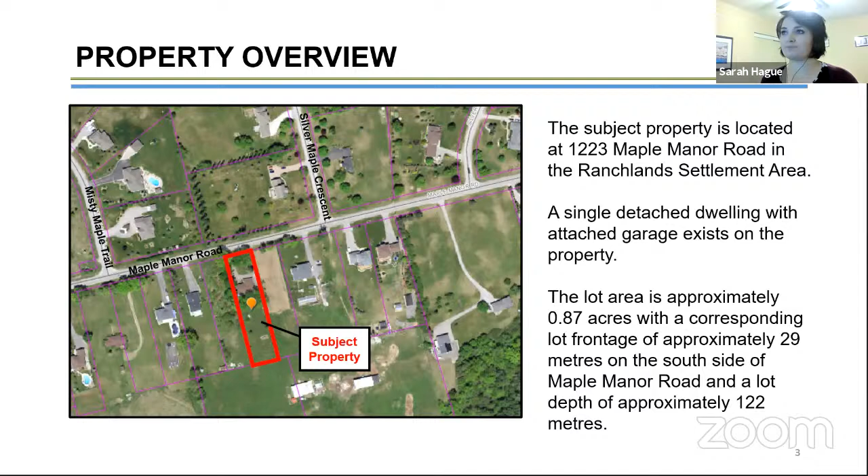The applicant is seeking relief from the provisions of the general zoning bylaw to construct two accessory structures, a detached garage and a shed, which exceed the maximum permitted lot coverage for accessory structures, and to allow the garage to be built 6 inches taller than the bylaw permits.

The subject property is zoned as Z2A, which is rural residential, in the general zoning bylaw 689-83. A dwelling unit and accessory uses are permitted land use activities within this zone.

The proposed shed is 12 feet by 12 feet, or 3.66 meters by 3.66 meters, for an overall size of 13.4 square meters, or 144 square feet. It is proposed to be 4.2 meters in height.

The proposed garage, which the elevations can be seen here, is 9.14 meters by 15.24 meters, or 30 feet by 50 feet, for an overall size of 139.4 square meters, or 1,500 square feet. The height is proposed to be 5.36 meters, which is 17 feet 6 inches. The eastern portion of the existing driveway is proposed to be extended to access this detached garage.

The variances being requested are to increase the lot coverage for accessory structures from the existing provision of 3% up to 4.4% to allow both the shed and the detached garage, and to increase the maximum height of the detached garage only from 5.2 meters to 5.4 meters.

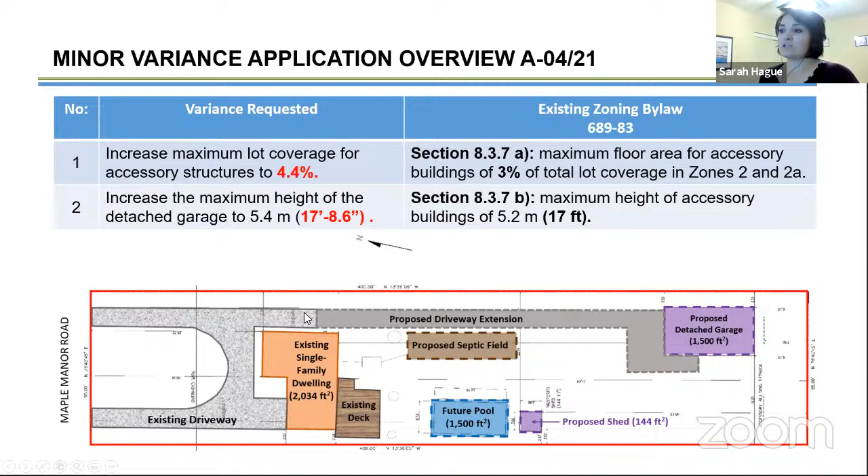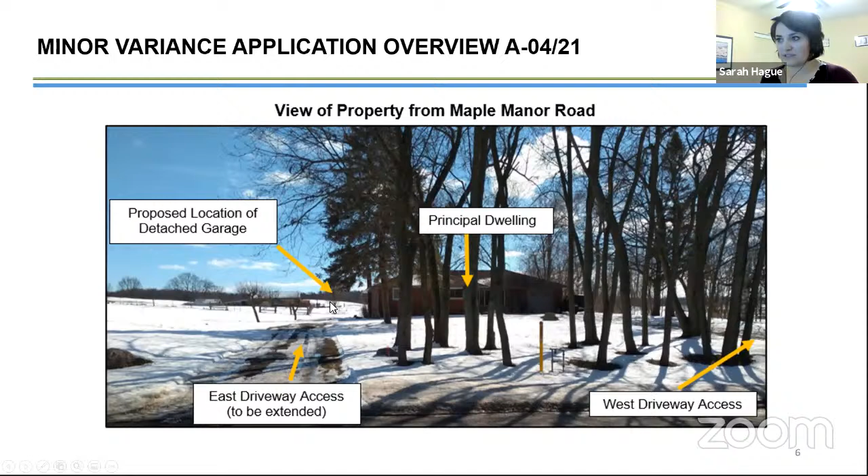This is the view of the property from Maple Manor Road. As you can see, this is the existing dwelling here. The western driveway access is about here. This is the eastern access, and the proposed detached garage is about here.

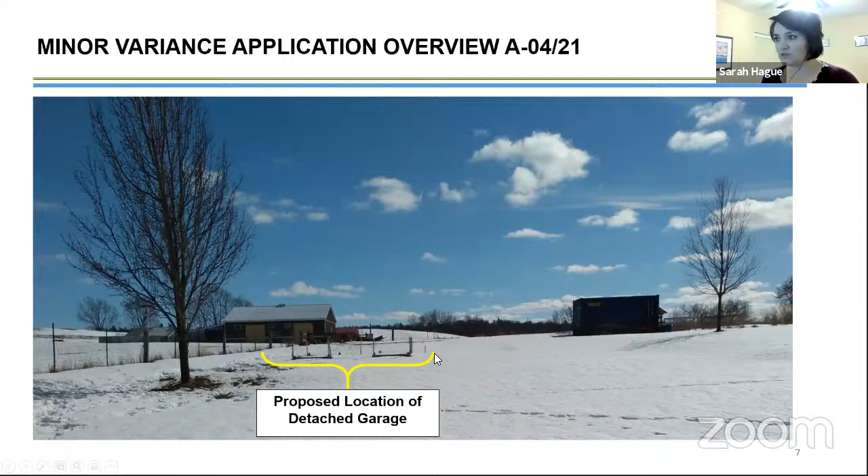This is a view from the rear yard of the property towards the south, looking approximately where the location is proposed, which is in this area. I superimposed the elevation of the front, and this is approximately what it would look like. It's not 100% accurate to scale, but this is the best I can do. So this is an idea of what it would look like once developed.

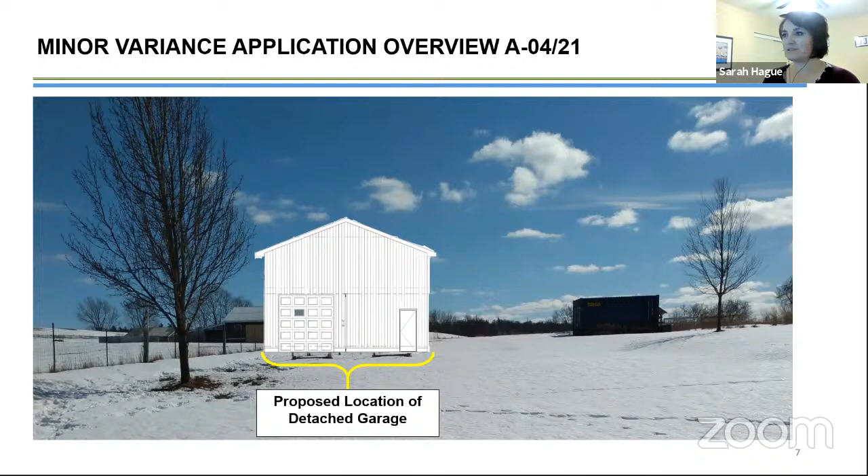In terms of the planning analysis, the application needs to meet the 4 tests of a minor variance. The first is whether the proposed variance conforms with the general intent of the zoning bylaw. The intent of the zoning bylaw is to regulate land uses and controls with respect to the placement of buildings on land. The subject lands are zoned Z2A, rural residential, and a dwelling unit and accessory uses, including a shed and detached garage, are permitted land uses within this zone.

Number 2, does the proposed variance conform with the general intent of the official plan? The subject lands are located within the Ranchlands settlement area, as illustrated on map 2.19, and rural area and protected countryside, as illustrated on map 7 of the official plan, and residential uses are permitted activities within all of these designations.

Number 3, are the variances minor in nature? The maximum lot coverage provision is intended to restrict the size of accessory structures to ensure an appropriate balance between built form and open space, recognizing the remaining open space at the rear of the property, plus the existing deck and proposed future pool. Staff are of the opinion that the proposed increase in lot coverage will not negatively impact the amenity space of the property, and that the variance is minor in nature.

The maximum height provision for accessory structures, specifically the detached garage, is to ensure these structures are not more prominent than the principal dwelling. The proposed increase of 0.2 meters is extremely minor and will not be discernible from its location, approximately 97.5 meters from the street line. Additionally, with its proposed location in the southeast corner, it will not interfere with or impact the amenity space of adjacent properties.

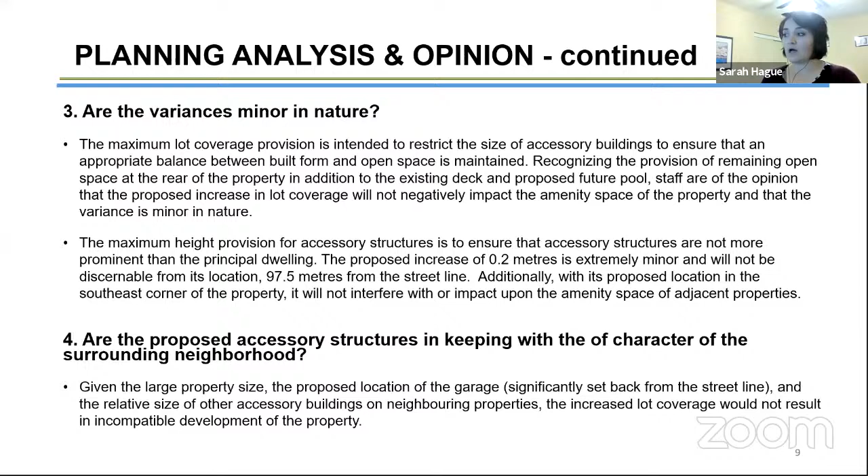Number 4, are the proposed accessory structures in keeping with the character of the surrounding neighborhood? Given the large property size, the proposed location of the garage set back significantly from the street line, and the relative size of other accessory structures on neighboring properties, the increased lot coverage would not result in incompatible development of the property.

In terms of consultation, we circulated the notice as per the Planning Act, and no correspondence was received from members of the public. From agencies, we received no objections from the GRCA, Energy Plus, or the Region of Waterloo.

The Public Works Department commented that if modifications to the existing entrances are required or requested, a permit must be obtained from the township, and a lot grading plan will be required at the time of a building permit. The building department also commented that the accessory structure cannot be utilized to run a business out of or

as a secondary dwelling. Permits will be required for the accessory structures, pool, and new septic system. Compliance with the Ontario Building Code and all municipal bylaws will be required at the time of permitting, and a grading plan and survey may be required at the time of permits.

K-Smart Engineering commented that construction of the garage will reduce grass area and increase rainfall runoff from the roof, and suggested that the owner provide additional information regarding grading and runoff direction.

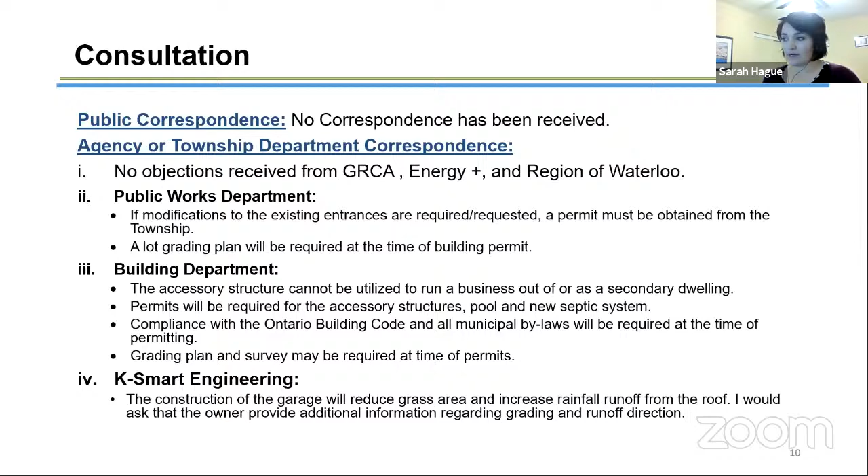In terms of a staff recommendation, based on the planning analysis, staff recommend that minor variance A-04/21 for 1223 Maple Manor Road be approved as follows: relief from section 8.3.7A of General Zoning Bylaw 689-83 to permit the maximum floor area of all accessory buildings to exceed 3% of total lot coverage, to a maximum of 4.4% total lot coverage, and relief from section 8.3.7B of General Zoning Bylaw 689-83 to permit the maximum height of the proposed detached garage to exceed 5.2 meters or 17.06 feet, to a maximum height of 5.4 meters or 17.72 feet, subject to the following condition.

The proposed accessory buildings shall not exceed a gross floor area of 154 square meters or 1,657 square feet.

Back to you, Madam Mayor.

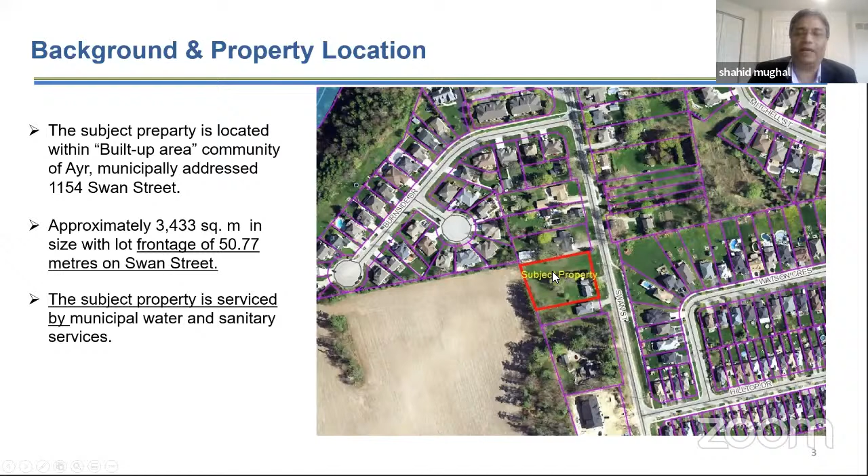The subject property is located within the built-up area community of Ayr, which is municipally addressed 1154 Swan Street. The property is approximately 3,433 square meters in size, with a lot frontage of 50.77 meters on Swan Street. The subject property is serviced by municipal water and sanitary services. As you can see on the picture, the subject property currently contains a single detached dwelling and a detached garage.

The northern portion of the property contains an easement in favor of Enbridge Gas for the purpose of a high pressure gas transmission pipeline. The balance of the property, as you can see, has landscaped grass and contains several mature trees.

Staff also reviewed provincial policy documents, regional statutory documents, and township statutory documents as well. The provincial policy statement encourages intensification and high density in the settlement area, and states that the settlement area shall be the focus of growth and development. The Growth Plan for the Greater Golden Horseshoe also directs growth to settlement areas and encourages development through intensification within built-up areas. The Growth Plan also encourages intensification generally in the settlement area, supports housing choices through the achievement of minimum intensification and density targets, and identifies a diverse range and mix of housing options and densities.

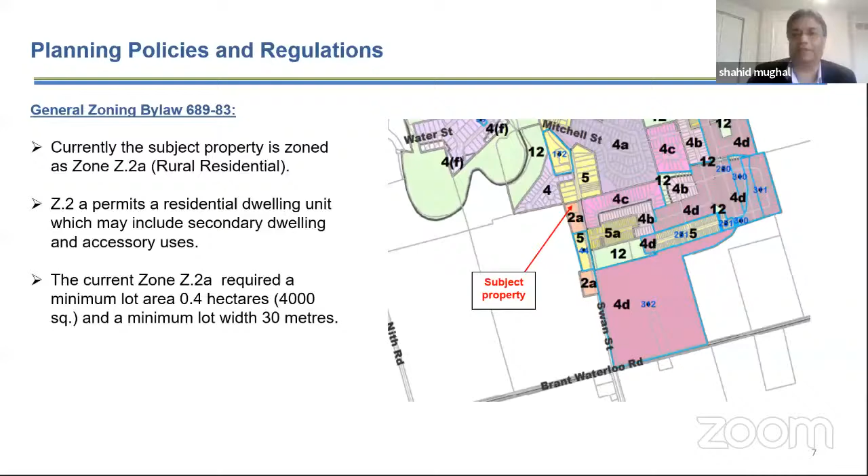Let me share the proposed plan. As you can see on the screen, the severance sketch. The applicant proposed 2 semi-detached in the form of 4 freehold residential units, lot 1A, 1B, 2A, and lot 2B. The proposed lot line dividing the semi-detached dwelling would be along the common wall.

The proposed lots would vary in size from approximately 556 square meters to 1,742 square meters, with corresponding lot frontage of 8.5 meters to 25.27 meters. As you can see, there are 3 lots with frontage of 8.5 meters. The 4th lot is 9.14 meters, but that also incorporates the easement block, so that would be approximately 25.27 meters in width.

An easement is also proposed on the northern portion of the property to recognize the existing Enbridge gas pipeline corridor within the reconfigured lot boundary. The existing residence, as I mentioned, there's also a single detached dwelling and accessory structure on the property, and that will be removed to accommodate the proposed development.

Each proposed dwelling unit is to have driveway access onto Swan Street, and each lot will be serviced by municipal water and sanitary sewer. The zoning bylaw amendment application is also proposed.

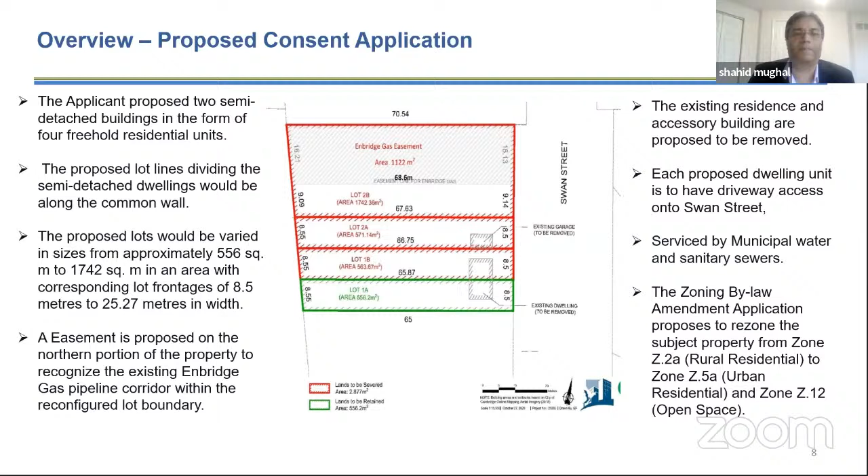Following the public consultation process, staff also notified the adjacent property owners. So far, we haven't received any public comments or concerns regarding this application.

Staff also circulated the sufficient package to agencies and departments. The regional staff have expressed no concern, and mentioned that prior to final approval, the applicant needs to complete the required access permit, complete a lot grading plan, and enter into a registered development agreement with the Region of Waterloo to include a noise warning clause in all agreements of offer of purchase and sale, lease and rental agreements for both the severed and retained lands.

Grand River Conservation Authority expressed no concern. Public Works Department expressed no concern.

The Township Consulting Engineer commented that at the time of building permit application, the proponent needs to provide a site grading plan and servicing plan prepared by an engineer. They also required a soil assessment to show suitability for infiltration. As no drainage onto adjacent land is allowed, swales are to be constructed along the property line to direct surface water towards Swan Street.

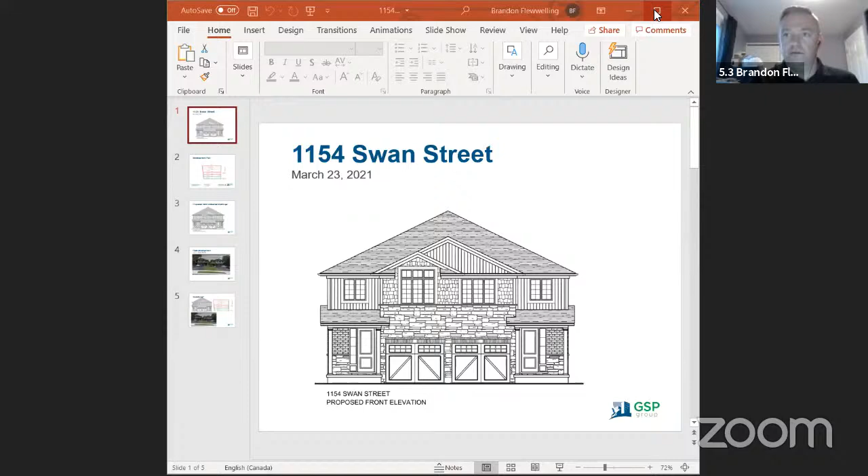Good evening, my name is Brandon Flewelling. I'm the planning consultant to the applicant, and I just wanted to provide a few comments to supplement what we've heard from the staff report already.

What is proposed are 2 semi-detached dwellings. Before you is a line elevation of what the proposed dwellings would look like when developed. They will be built and sold by Willow Homes, which has a history of development in the community and has built similar units just north of this property on the opposite side of Swan Street. I have representative photos of that, and they also developed a condominium along Butte Street in the township, so it's a well-known developer here.

So proposed is the elevation. They would be semi-detached units, 2 buildings looking generally like this. Each semi-detached unit would be approximately 2,400 square feet, quite large for a semi-detached unit. They would have a single car garage, and it's proposed they be set back into the site a little further to allow for a longer driveway to accommodate 2 vehicles in front of the home if possible.

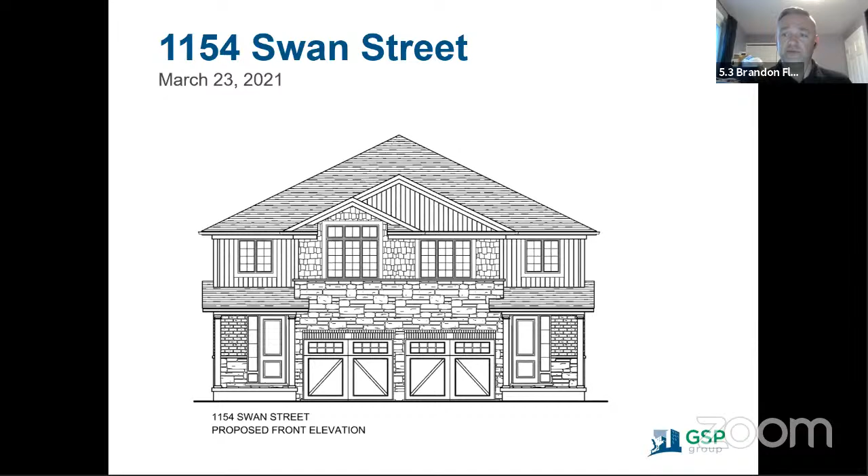Mr. Mughal did a good summary of the proposed consent application. As he noted, there is a zone change required along with this, and when committee closes and goes back into council later, you'll see this same application come back for the zone change portion. I'll be available for questions at that time, but I won't duplicate my presentation.

Before you now is the proposed severance application. The existing house and garage would be demolished, and 2 semi-detached dwellings built with the demising wall down the middle, aligned with the property line.

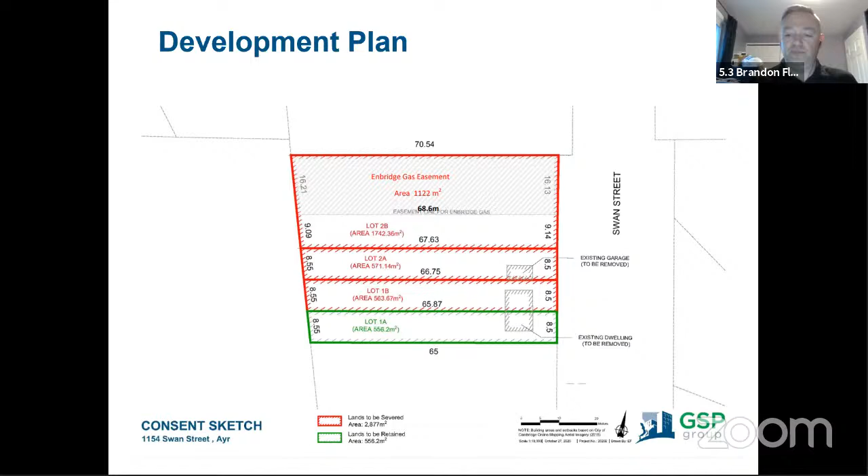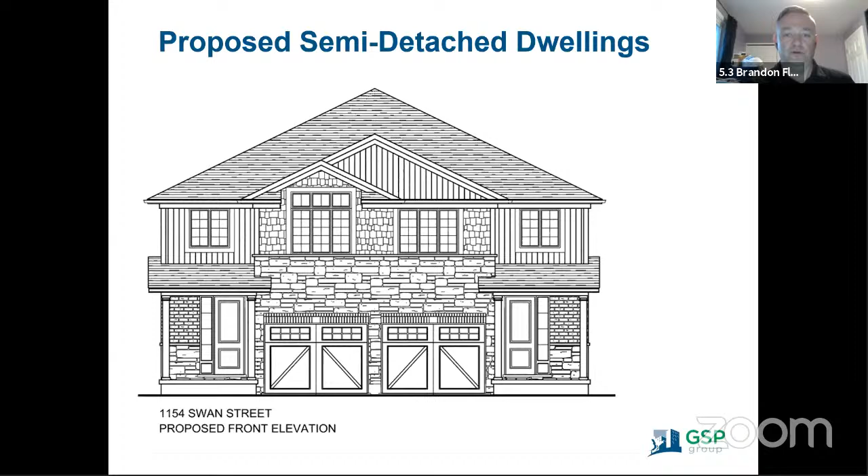And really, that concludes my presentation. I look forward to hearing any comments from members of the committee. As I said, I'll be available for the zone change portion of the meeting, but won't duplicate my presentation. If there are any questions for either, I'd be happy to answer them now.

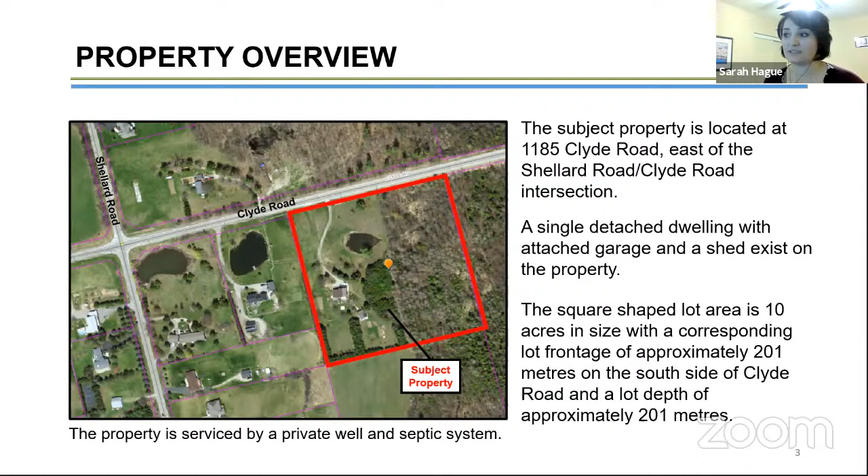The subject property is located at 1185 Clyde Road, east of Shellard Road and east of the Shellard Road Clyde Road intersection. A single detached dwelling and attached garage and shed exist on the property. The square-shaped lot is 10 acres in size, with a corresponding lot frontage and lot depth of 201 meters. The property is serviced by a private well and septic system and is outlined in red on the map.

The subject property is zoned Z1 Agriculture in General Zoning Bylaw 689-83. A dwelling unit, coach house, and accessory uses are permitted land uses and activities within the Zone 1 Z1 zone.

The applicant is seeking relief from the provisions of the General Zoning Bylaw to construct a coach house within the front yard of the property, which also exceeds the maximum size of a coach house. The proposed coach house is 7.32 meters by 11.89 meters, approximately 24 by 39 feet in size, and 4 meters in height, or 13.12 feet.

I've put a more detailed lot plan of the property here. It is a very large property, but as you can see, the eastern portion is covered by GRCA wetlands and needs to be avoided. There is a pond on the northern portion of the property. The existing house is here in the middle, with a shed in the rear yard, and the existing well here and existing septic bed here.

The proposed coach house is outlined here in yellow, with the proposed septic bed for the coach house here, and the proposed well is here.

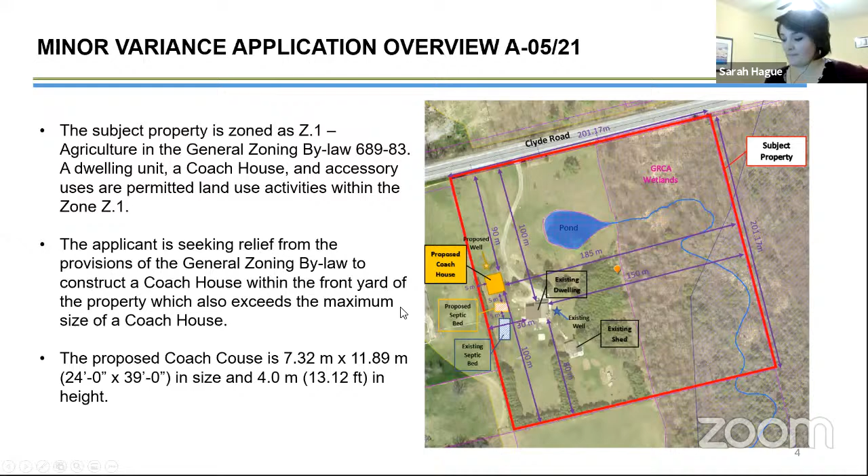To permit the minor variance application, the overview is the requested variance to permit a coach house with a maximum size of up to 87 square meters or 940 square feet, which is approximately 70% of the footprint of the existing principal dwelling unit. Whereas section 6.40.7(i) of the bylaw permits the size of a coach house to be not greater than 40% of the footprint of the dwelling unit or 110 square meters, whichever is lesser.

As you can see, the proposed size of the coach house is smaller than the maximum size of a coach house, but is exceeding the percentage of the dwelling unit, as it's only taking into consideration the main floor, the footprint. It doesn't consider the second story or the garage.

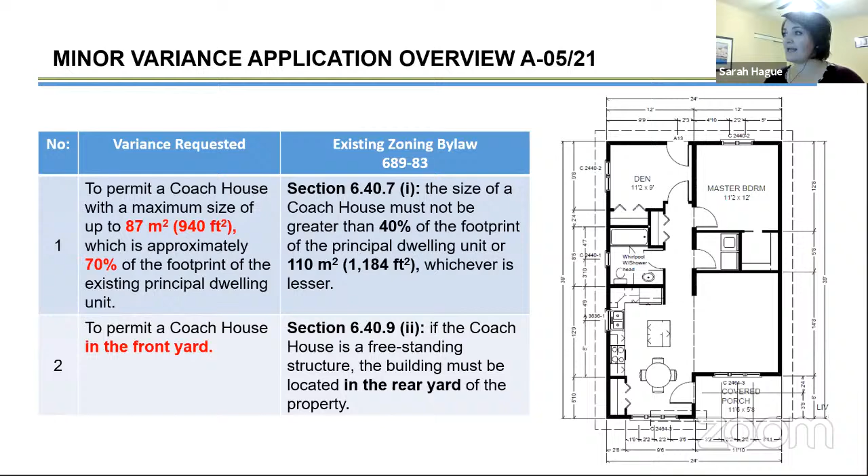The second variance is requested to allow the coach house in the front yard, where the provision permits it only to be in the rear yard of the property. This is a layout of the proposed coach house here.

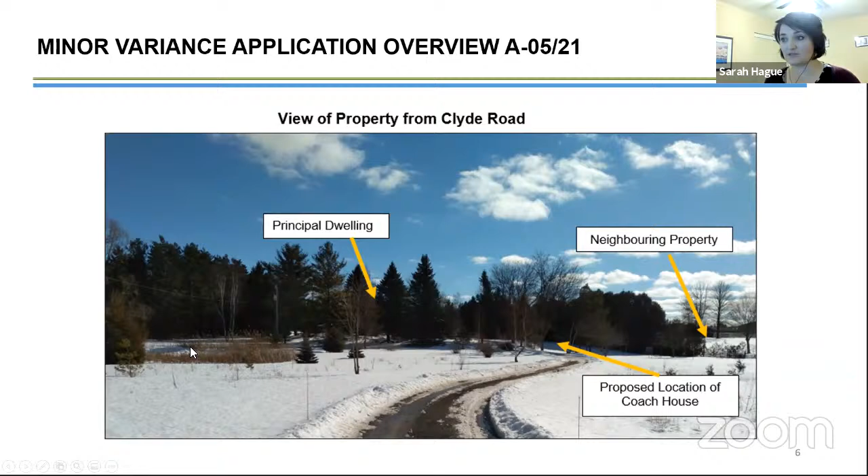This is a view of the property from Clyde Road. It is very private. There are several mature trees on the property, which shield both the principal house and will partially shield the location of the coach house from view of the street. This is the neighboring property here. The proposed location of the coach house is in this area, and the principal dwelling is located behind these trees. This is the pond referenced on the map.

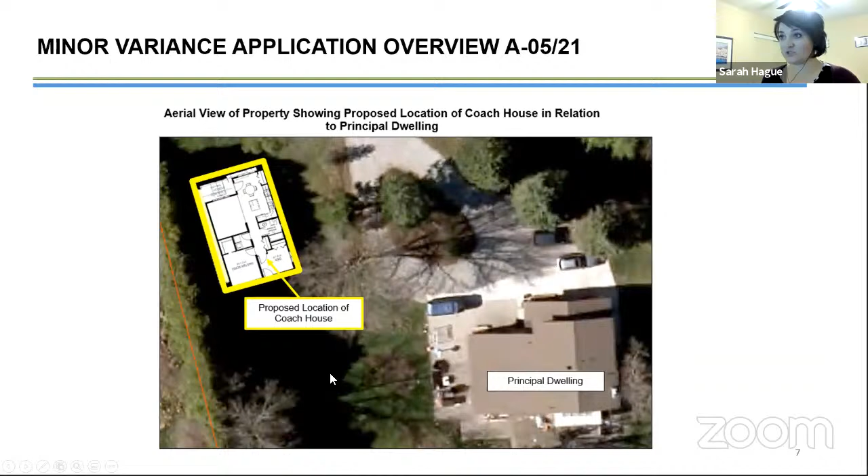This is an aerial shot of the property showing the location of the existing house and generally where the coach house will be with the layout here. This is also showing a relative size of the coach house.

In terms of the planning analysis, I wanted to look at if there were any other alternative locations. The provisions of the bylaw do permit a coach house to only be in the rear yard. While there is a very large rear yard on this property, anything behind the main dwelling, there are reasons why it cannot be located in any of them. I've chunked out the property here in 6 different sections.

Section A, none of this area can be used as it is a wetland. Section B is within 30 meters of the wetland, which also needs to be avoided and is also heavily forested. Technically he could have put it close to here, but it would have required the removal of several mature trees, which the applicant wanted to avoid.

Number C, this area here is not accessible because of the terrain. There's a low-lying area around here, which actually required the applicant to construct a footbridge to access even this shed. So it would not really have been accessible via a driveway to get back here, nor would you have been able to build a driveway due to the location of the shed and the mature trees. This section here labeled as D has the same terrain issues.

So there's a low-lying area here that would be very hard to get over. You'd need culverts and that sort of thing. You would need to extend the driveway significantly, and it would have to go over the septic bed, which you can't do. So location E can't be used as it is the existing location of the septic bed for the primary house.

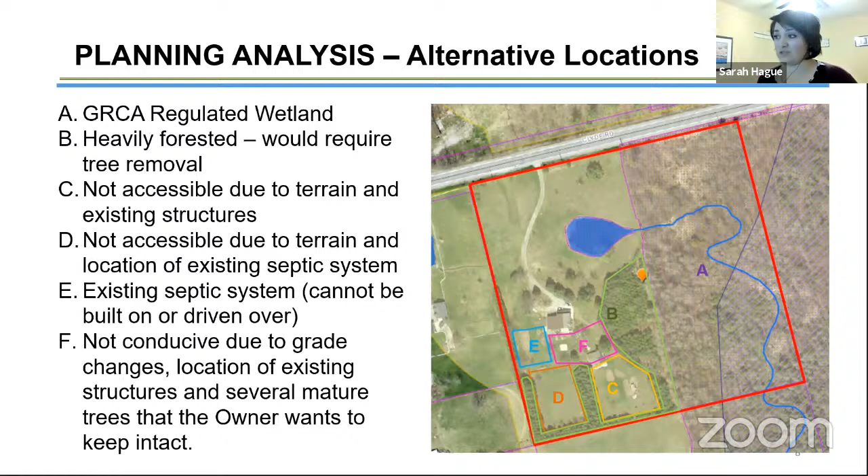So in terms of the planning analysis, we again need to evaluate it against the 4 tests of a minor variance. Number 1 is if the proposed variances conform to the general intent of the zoning bylaw. The intent of the zoning bylaw is to regulate land uses and controls with respect to the placement of buildings on land. Subject land is zoned Z1 agriculture in the zoning bylaw, which allows a dwelling unit, accessory uses, and a coach house.

Does the proposed variances conform to the general intent of the official plan? Residential uses are permitted activities within the agricultural, rural area, and protected countryside designations, which this subject property has.

Number 3, are the variances minor in nature? The intent of restricting the size of a coach house and only allowing it to be located in the rear yard of the property is so that it remains subordinate to the primary dwelling. The subject property is unique in terms of its terrain and the associated environmental features. So despite its large size, it's not possible to locate the coach house in the rear of the property.

The proposed coach house is 936 square feet, which is approximately 250 square feet less than the maximum size allowed in the bylaw. But the total size of the principal dwelling is over 2,700 square feet, 40% of which is 1,100 square feet, which is well above the proposed 936.

But as the provision states that the coach house must not be greater than 40% of the footprint of the dwelling unit, which does not include the attached garage or second story, the footprint of the dwelling unit is calculated as 1,348 square feet, 40% of which is only 539 square feet, which is really not sufficient enough to allow for a dwelling unit or a coach house.

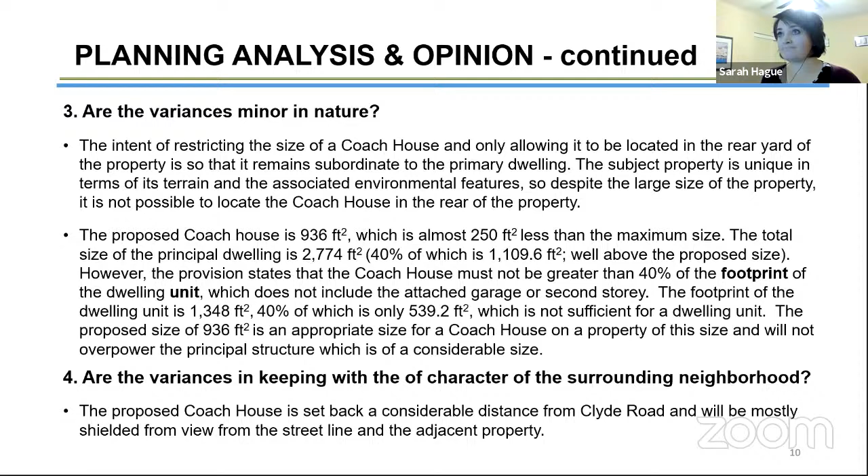As per the Planning Act, we did circulate the application as required. We received 1 letter of concern from a neighboring property. The concern regarded flooding in the area. There are several private ponds in this area, and he has noticed that they do flood from time to time, and just wanted to make sure that the proposed coach house would not be affected by the flooding, and was concerned about water control problems in the future, which we will handle through the building permit process.

In terms of agency consultation, no objections were received from K-Smart Engineering, Energy Plus, the Waterloo Catholic District School Board, or the Region of Waterloo. The Public Works Department commented that Clyde Road is under the jurisdiction of the Region of Waterloo.

The applicant is advised that a permit may be required from the Region of Waterloo for any modifications to the existing entrance, which I do not believe are proposed at this time. And the applicant is to be advised that a new entrance will require a permit from the Region of Waterloo. The building department has no concerns from a building code perspective, but noted that permits will be required for the septic system and the construction of the coach house.

The Grand River Conservation Authority has no objections. A permit for the construction of the coach house and installation of the septic system will require a permit from the GRCA under Ontario Regulation 150-06. The entire area is regulated by the GRCA due to the Moffat Creek Swamp provincially significant wetland, a tributary of Moffat Creek, and portions of its associated floodplain.

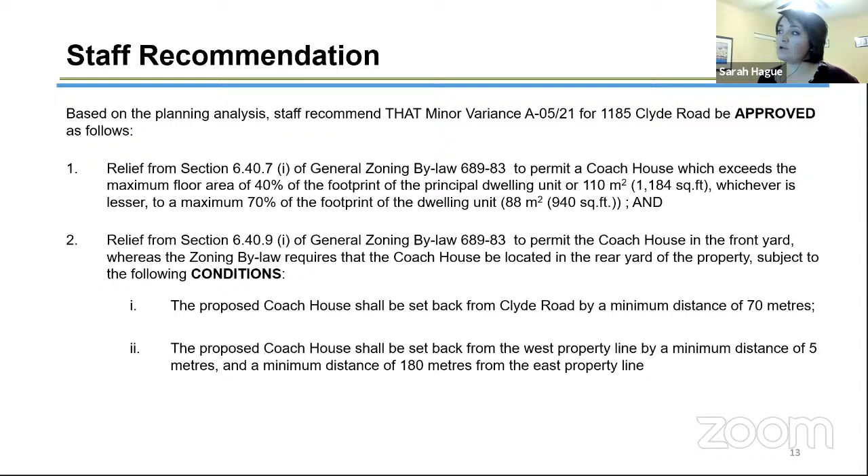Relief from section 6.40.7I of General Zoning Bylaw 689-83 to permit a coach house which exceeds the maximum floor area of 40% of the footprint of the principal dwelling unit, or 110 meters squared, whichever is lesser, to a maximum of 70% of the footprint of the dwelling unit, 88 square meters or 940 square feet. Also relief from section 6.40.9I of General Zoning Bylaw 689-83 to permit the coach house in the front yard, whereas the zoning bylaw requires that the coach house be located in the rear yard, subject to the following conditions.

The proposed coach house shall be set back from Clyde Road by a minimum distance of 70 meters, set back from the west property line by a minimum distance of 5 meters, and a minimum distance of 180 meters to the east property line.

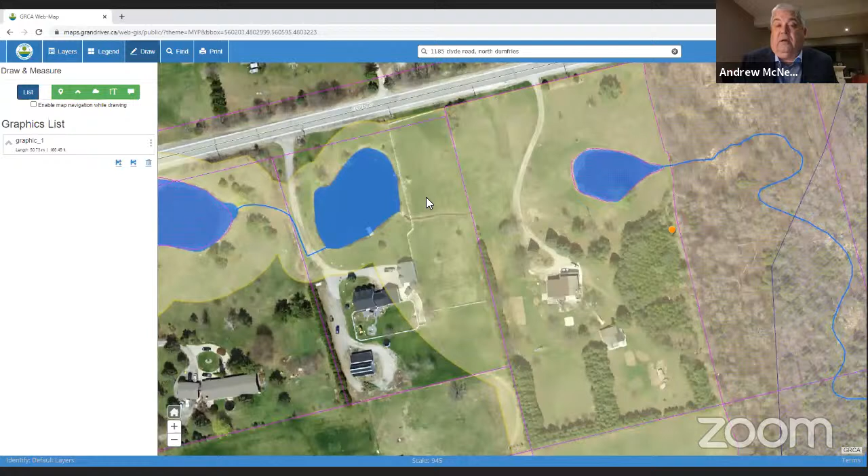We know that sometimes these ponds will tip over. They'll start generally at the most westerly pond, flow toward the center pond, and when it tips, it moves easterly toward Mr. Ewing's property and that pond. Then when his pond tips, it goes into the wetland feature to the east.

So if we go to the building site where the Ewing residence is situated today, and where the proposed tile bed and coach house are proposed, under the building code, when the building permit application is pursued, there will be a requirement for a plot plan which would site the building and septic system within the boundaries of the property, with a minimum 5 meter offset from the west property line. There will also be a requirement for a grading and terrain plan showing the building footprint, its finished floor elevation, and the crowning of the land away from the building envelope, plus a series of swales required to convey the overland flow, as well as a demonstration of the ability to move the water that will seasonally flow from those existing ponds easterly toward the wetland area. We do sign off on those engineering grading plans as part of the building permit process.

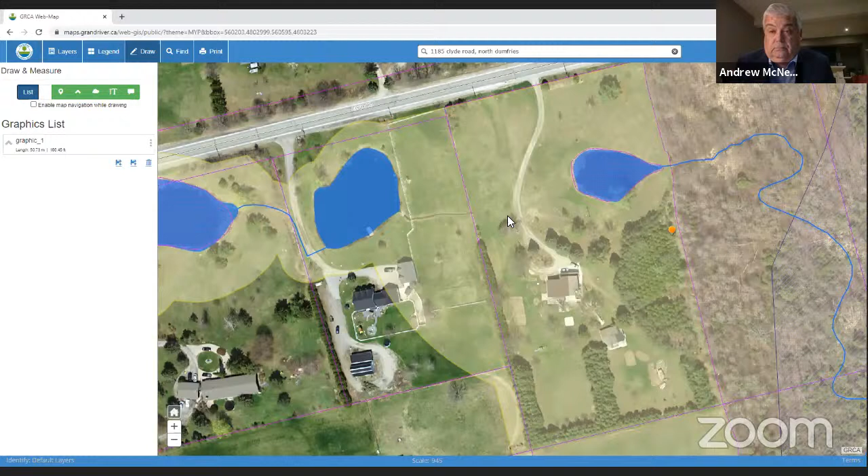Councilor Gillespie: one more question. Did I read somewhere that you're going to put trees along the western fence line between the proposed coach house and the adjacent resident?

Through you, Madam Mayor, there are existing mature trees along that entire fence line. I'll bring up that screenshot one more time. As you can see here, this entire area is very heavily treed, very tall. The coach house is proposed about here, so the entire location of the coach house is already shielded from the neighboring property.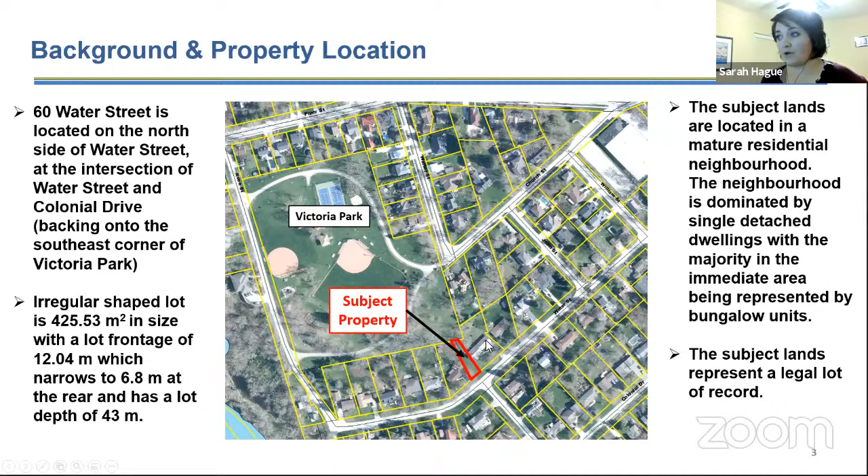The applicant is seeking relief from the provisions of the general zoning bylaw to construct a single detached dwelling on the undersized lot. The minor variance application is requesting relief from section 8.3.3b of the zoning bylaw to reduce the minimum side yard setback from 2.4 meters for a 2-story dwelling to 1.2 meters on both sides.

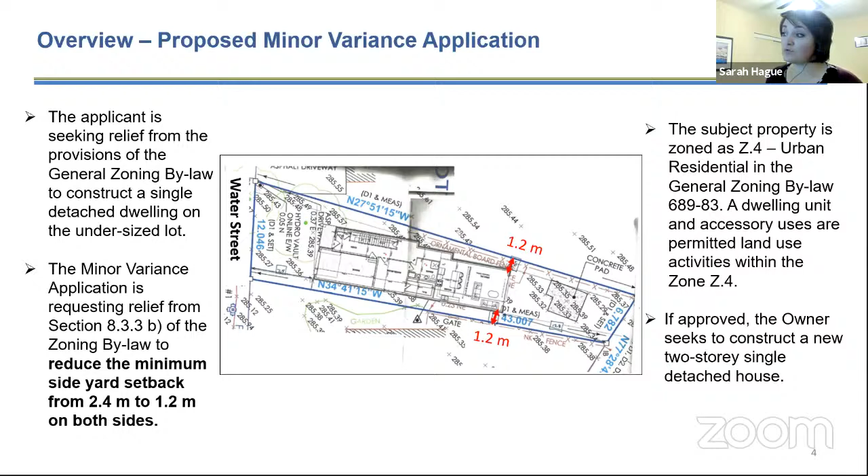This is an outline of the proposed development, and this is where the closest portion of the building to the setback is 1.2 meters. The subject property is zoned as Z4, urban residential. In general zoning bylaw 689-83, a dwelling unit and accessory uses are permitted land use activities within the Z4 zone. If approved, the owner seeks to construct a new 2-story single detached house.

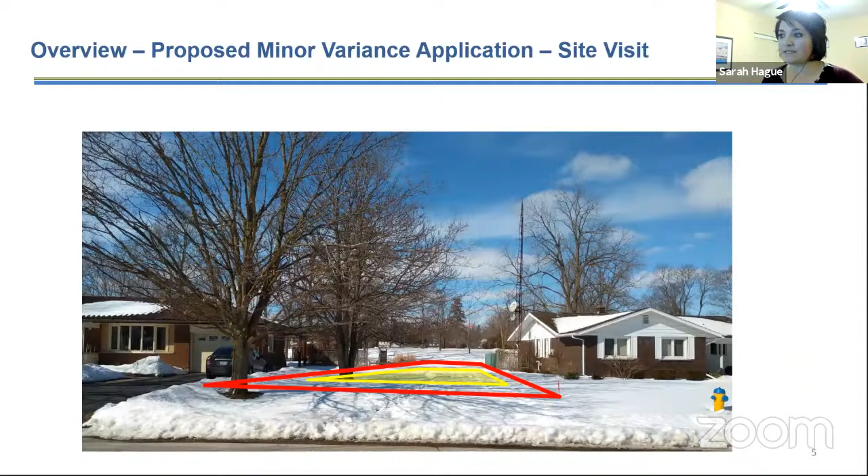In terms of public correspondence, we have received 11 letters from members of the public objecting to this application. One of the letters contained a petition of 47 names objecting to the application.

The key concerns outlined in those objections were that the proposed two-story dwelling with the reduced side yard setbacks is out of character with the neighborhood, which is primarily bungalows on wider lots. The lot was intended for pedestrian connectivity, linking Water Street and Colonial Drive with Victoria Park. The well situated at the rear of the property, originally designed to supply potable water to the neighborhood, may still exist.

The application may require additional variances not yet requested, and the application is not minor or desirable for the neighborhood. In terms of agency correspondence, Energy Plus did not object to the proposal.

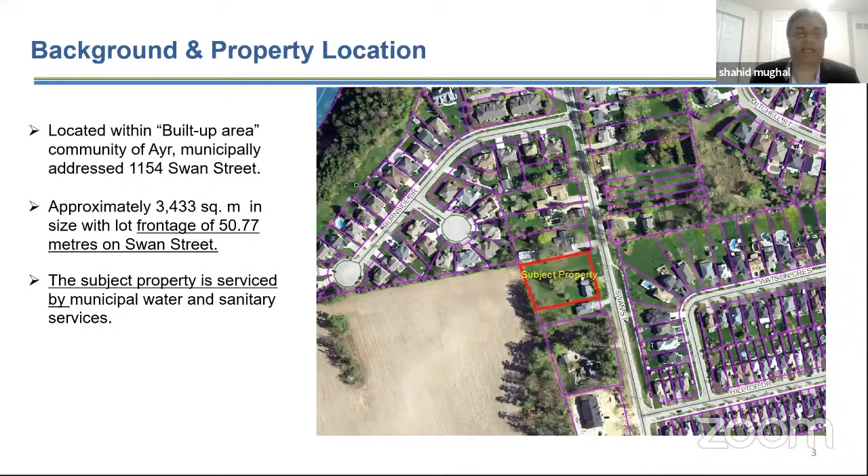As you can see in the picture, the subject property consists of a single detached dwelling and detached garage. The northern portion of the property contains an easement in favor of Enbridge Gas for the purpose of a high pressure gas transmission pipeline. The balance of the property contains landscaped grass and several mature trees.

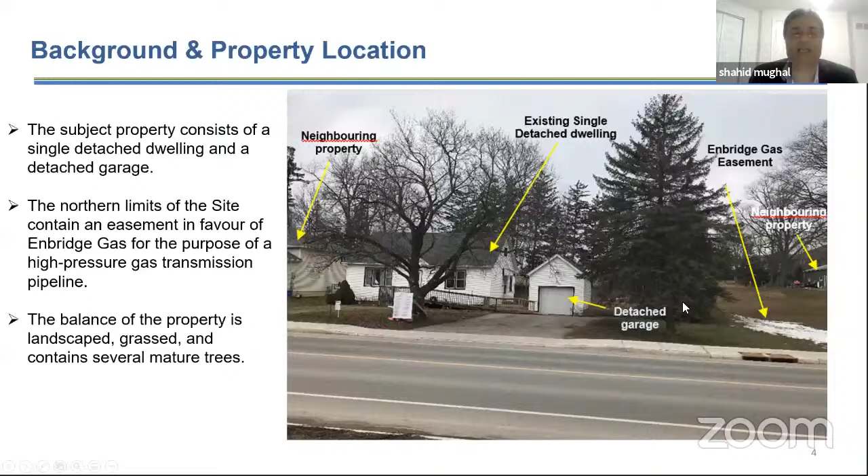Staff also reviewed the provincial, regional, and township official plan statutory documents. All provincial, regional, and township statutory plans talk about the same thing. The provincial policy statement, the growth plan for the Greater Golden Horseshoe, and the regional official plan all encourage intensification.

If you see the township official plan, it also encourages the provision of new dwelling units in the built-up area in the Ayr urban area through infill, conversions, intensification, or redevelopment compatible with the surrounding uses.

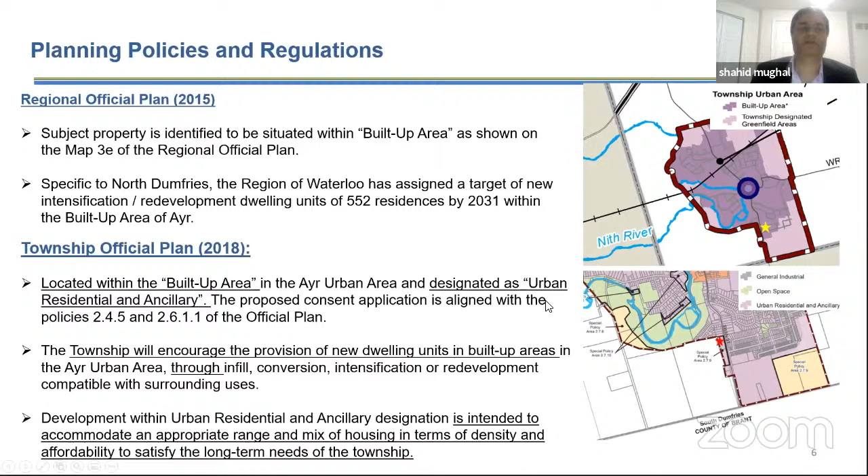Currently, the subject property is zoned as Zone 2A rural residential. Zone 2A permits a residential dwelling unit, which may include a single detached dwelling plus accessory use. The current zoning also requires a minimum lot area of 0.4 hectare, which is 4,000 square meters, and minimum lot width of 30 meters. The applicant proposed 2 semi-detached buildings, which requires amending the land use classification to permit the proposed development, which is 2 semi-detached buildings in the form of 4 dwelling units.

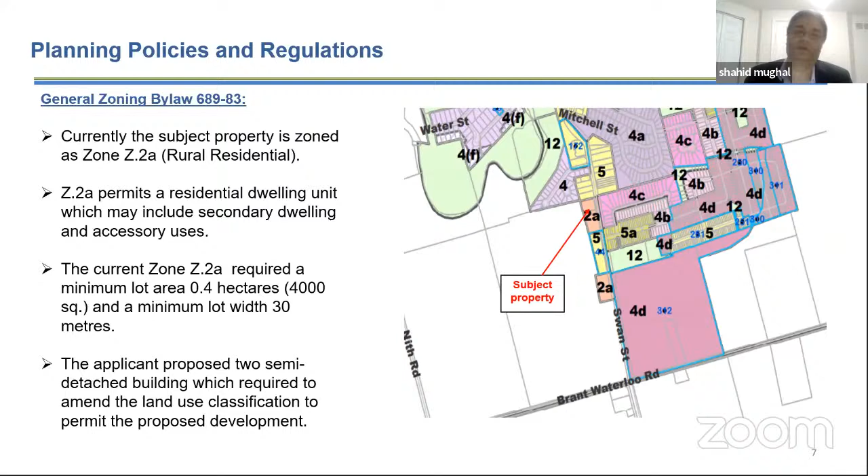As I discussed earlier, the subject property is currently zoned as Zone 2A, which requires 4,000 square meter lot size, 30 meter lot width, and allows only a single detached dwelling and accessory use. The applicant is proposing a zoning bylaw amendment to facilitate the redevelopment of the subject land to establish a total of 4 residential lots, proposed in the form of 2 semi-detached dwellings. Therefore, the applicant is proposing to rezone the property from Zone 2A to Zone 5A urban residential.

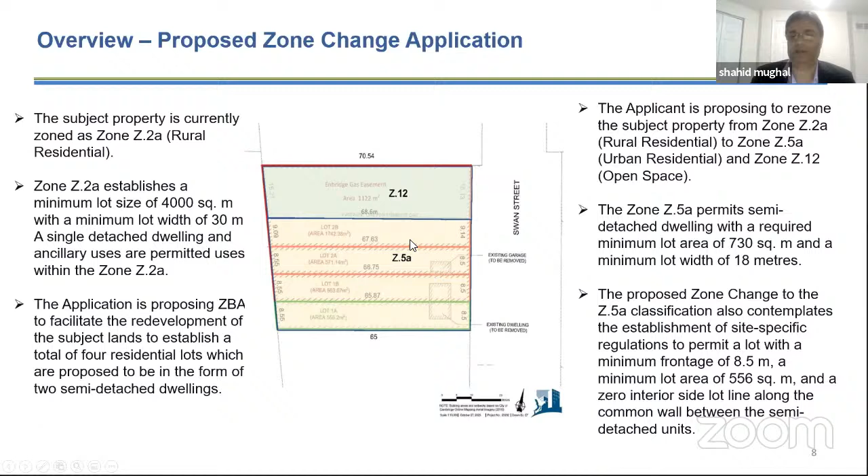Zone 5A permits semi-detached dwellings with a required minimum lot area of 730 square meters and minimum lot width of 18 meters. However, the proposed zone change to the Zone 5A classification also contemplates the establishment of site-specific regulations to permit a lot with minimum frontage of 8.5 meters and a minimum lot area of 556 square meters, along with 0 interior side lot line along the common wall between the semi-detached units.

The site-specific zoning standards as proposed are necessitated because the parent Zone 5A classification did not contemplate the creation of 2 freehold lots for the semi-detached units. Each of the proposed semi-detached dwellings will be serviced by municipal water and sanitary sewer. It is proposed that each dwelling unit will have driveway access onto Swan Street.

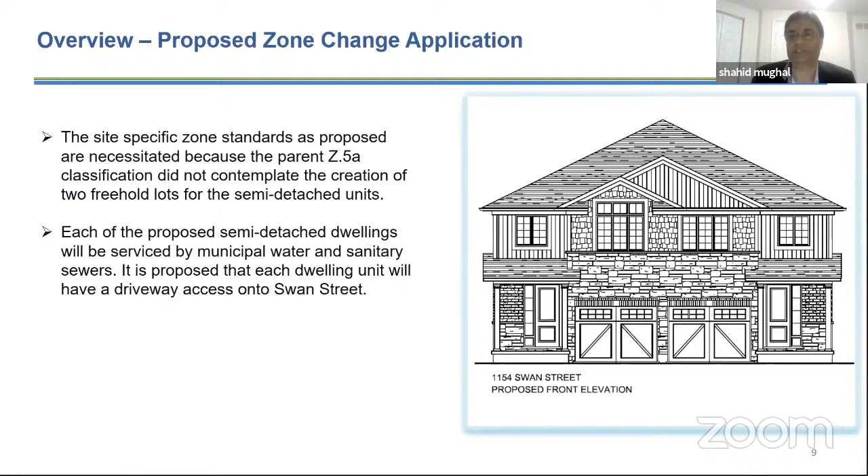So in response to the public consultation, we haven't received any comments or concerns from any member of the public. The submission package was also circulated to agencies and departments. Regional Municipality of Waterloo expressed no concern.

Energy Plus provided standard comments, including that the applicant needs to provide a legal survey, and will be responsible for 100% of the cost of servicing the new lot and relocating or upgrading services.

Waterloo Region District School Board commented that education development charges shall be collected prior to issuance of a building permit. Grand River Conservation Authority expressed no concern. Public Works of the Township of North Dumfries has no objection to the proposed development.

The township's consulting engineer commented that at the time of building permit application, the proponent needs to provide a site grading plan and service plan prepared by an engineer. A soil assessment is required to show suitability of infiltration. No drainage onto adjacent land is allowed, therefore swales are to be constructed along the property line to direct surface water towards Swan Street.

Staff, in consideration of the future report on the merit of the consent application, will consider all comments and correspondence received through this consultation process, provincial interest matters such as promoting efficient development, adequate provision of a full range of housing, orderly development, and the appropriate location of growth and development, as well as whether the proposed development conforms with the official plan and zoning bylaw amendment, and the dimension and shape of the proposed lots.

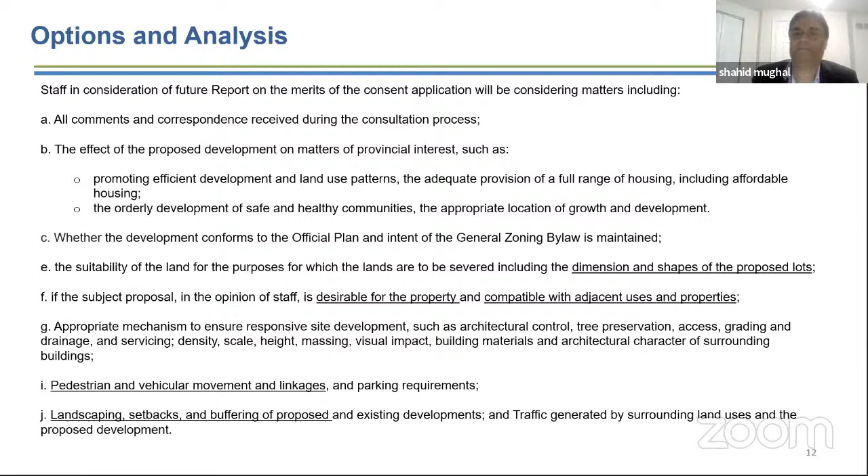That's the conclusion of my presentation. Staff is recommending that the comments and correspondence received from members of the public and government agencies through the consultation process be returned to staff for a future report to council on the disposition of this matter.

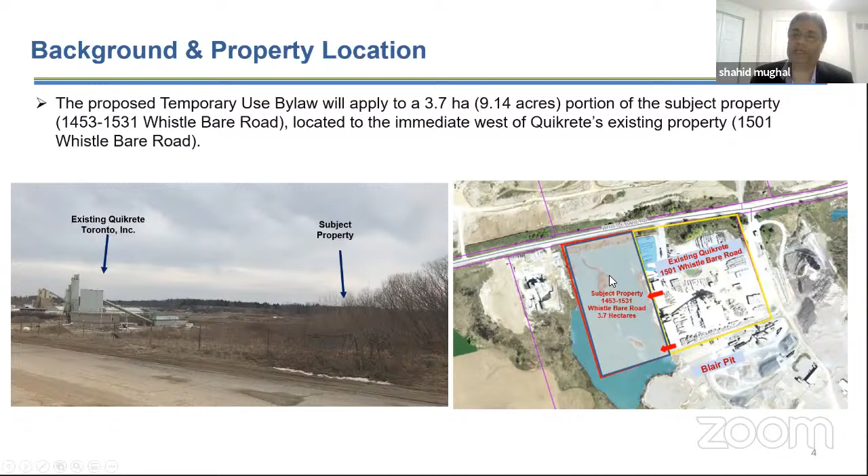Staff also reviewed the Planning Act, provincial policy statements, the regional official plan, the township official plan, and the bylaw as well. The Planning Act empowered the council to authorize the temporary use of land.

This authorization shall not exceed 3 years from the day of passing of the bylaw. The council may by bylaw grant a further period of not more than 3 years each during which the temporary use is authorized. So the Planning Act basically authorizes council to grant a temporary use bylaw for temporary use of land.

The provincial policy statements encourage or promote diversification of the economic base and employment opportunities through goods and services, including value-added products and the sustainable management or use of resources. Policy 1.3.1 on employment states it should provide opportunity for a diversified economy, including maintaining a range and choice of suitable sites for employment uses, which support a wide range of economic activity and ancillary uses, and take into account the needs of existing and future businesses.

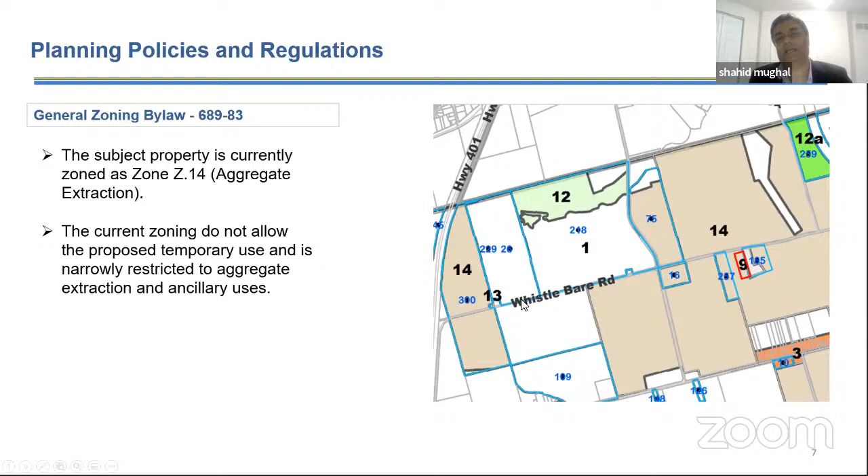The subject property is currently zoned as Zone 14. The current zoning, Zone 14, does not allow the proposed temporary use and is narrowly restricted to aggregate extraction, which is why the applicant is proposing a temporary use bylaw.

Let me share the purpose of this temporary use bylaw. The applicant is proposing, through enactment of the temporary use bylaw, to facilitate the storage of goods and material as well as the parking of vehicles, including but not limited to tractor trailers. The proposed temporary use bylaw will apply to approximately a 3.7 hectare portion west of the existing Quikrete property.

As you can see on the map, the subject property is outlined with a yellow line, which is 133 hectares. You can see the Quikrete properties, and the subject property located west of the existing Quikrete property is approximately 3.7 hectares.

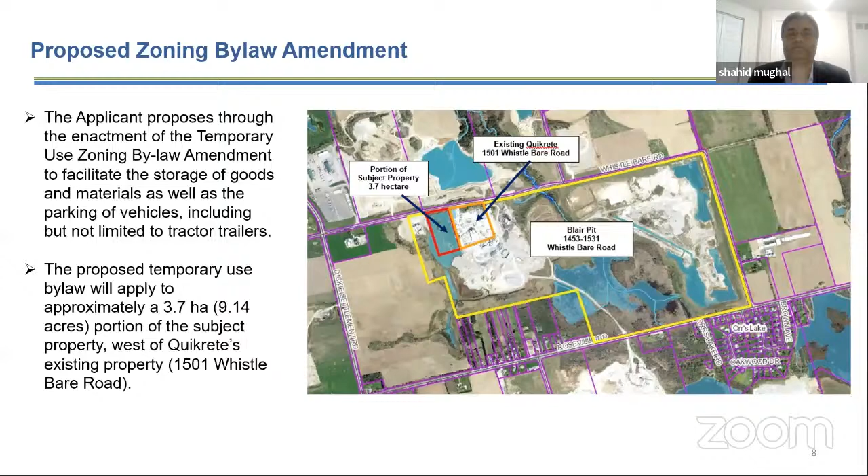The temporary use bylaw, if approved, would have a term of up to a maximum of 3 years. The owner or applicant can seek renewal or extension of the temporary use bylaw in accordance with the applicable provisions of the Planning Act, as mentioned earlier.

The temporary use bylaw, if approved, would also require a site plan application to demonstrate access to the Quikrete property, location and storage facility, parking, grading, landscape, and stormwater management area. As you can see on the map, access to the proposed temporary use development is provided from the existing Quikrete property, shown by 2 arrows on this map. So that won't be from the main road, but from the existing Quikrete property.

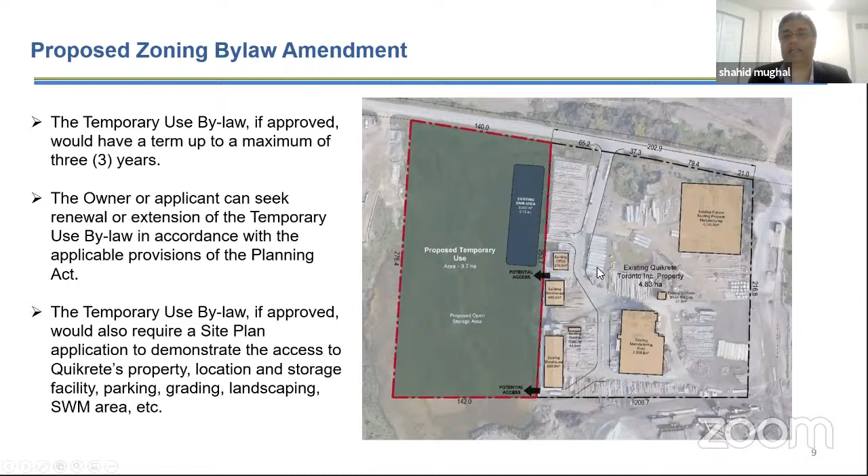In response to public consultation, there are 3 adjacent property owners who expressed concerns. The key concerns include noise and air pollution. For example, an adjacent property owner expressed concern that during the summer months, they tend to get a white residue on their lawns, cars, and house from dust blowover.

Other property owners also expressed concerns and raised questions about what will be stored and parked on the site, what the allowable operating hours will be, what material the existing pond will be filled with, and whether illumination will be required. Regarding the first 2 comments, noise and air pollution, the applicant mentioned they're concerned the aggregate operation is creating a negative impact on adjacent property owners because of noise and air pollution.

The application was also circulated to agencies and departments. The Region of Waterloo expressed no concern and has no objection. GRCA expressed no concern. Energy Plus has no objection to the proposed temporary zoning bylaw amendment, but provided standard comments that the owner will be responsible for all costs associated with the relocation and upgrade of existing electrical plant, at 100% cost.

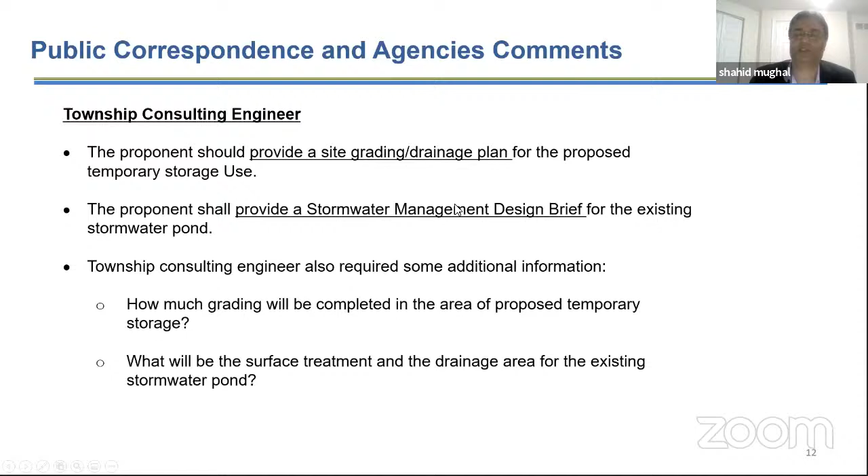So the staff, in consideration of the future report on the merit of the application, will be considering all comments and concerns received through this consultation process.

The provincial interest matters, for example, promoting diversification of economic base, employment opportunities, protecting the environment and public health and safety. Staff will also be considering whether the proposed development plan conforms with the township official plan, the subject proposal's desirability for the property, compatibility with adjacent uses and maintaining the character of the area, what site-specific provisions are required to address the future intended use of the subject land.

And what are the impacts of the traffic from the proposed development. The staff will also consider the appropriate mechanism to address site requirements such as drainage, grading, site servicing, stormwater management, and compatibility with the surrounding area of the proposed development.

So the staff is recommending to council that all comments and correspondence received from members of public and government agencies through the consultation process be returned to staff for a future report to council on the disposition of this matter. Thanks, Madam Mayor, that's the conclusion of my report.

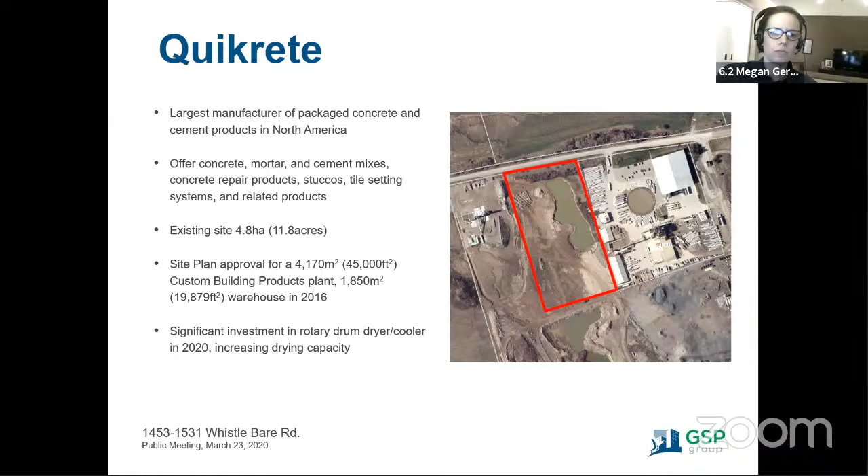So as Mr. Mughal had already mentioned, the official plan designation for the site is rural. It's also located within the protected countryside. There are existing policies that limit the growth of industrial uses in the rural area to within the current boundaries of existing industrial sites. So that is why currently we've requested temporary use at this time.

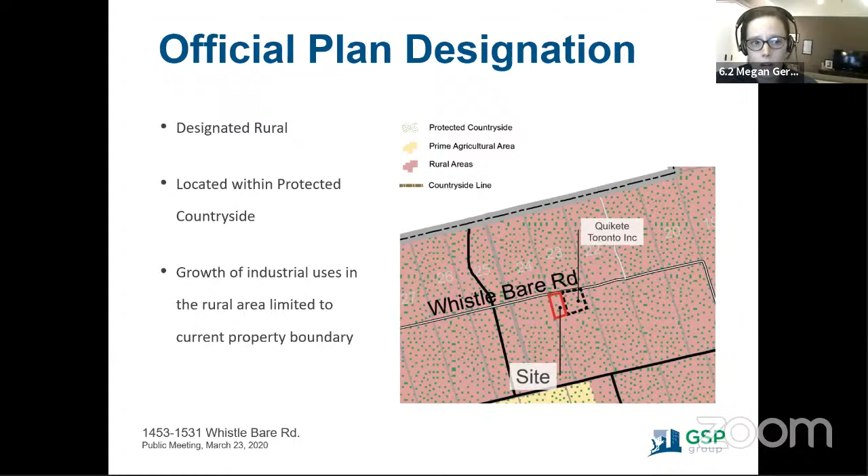From a zoning perspective, the site is zoned 14 mineral aggregates for aggregate extraction, and then the Quikrete site is zoned industrial and has site-specific permissions. The proposed temporary use would allow for the storage of goods and materials, as well as the parking of vehicles from their existing operations on a temporary basis.

The planning report was submitted as part of the application process, providing some justification for the proposed temporary use. No other technical reports were required as part of that submission process based on the pre-consultation requirements. However, given some of the comments received regarding noise and dust, we wanted to mention that Quikrete had completed an acoustical assessment report in July of last year, which was approved by the Ministry of Environment and Climate Change in December. Also, they completed an emission summary and dispersion modeling report as part of their environmental compliance approval amendment update, and that also meets the MOE requirements.

As was shown earlier, this is just a very basic site plan. Originally, a pond was envisioned for the site as part of the rehabilitation of the previous extraction from the Blair pit, and it's now being reconfigured from its original size and location as shown here to accommodate the proposed use, and the majority of that has already been completed as far as I know.

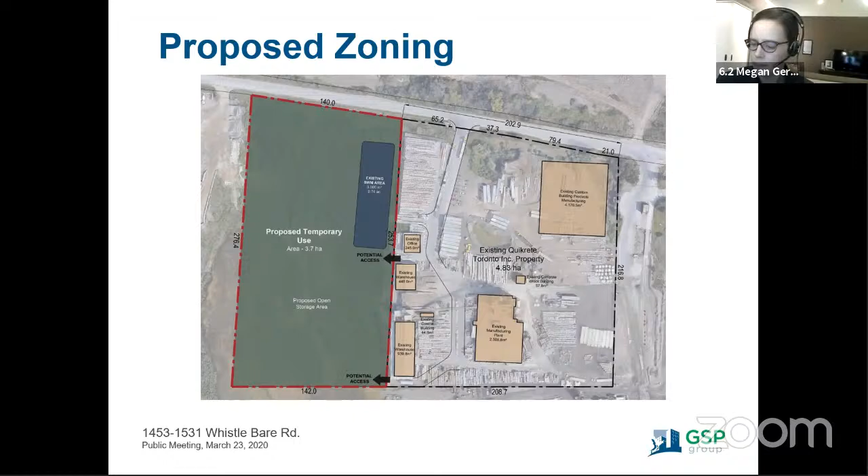In conclusion, Quikrete has expanded and intensified their existing business as much as they can within the limits of their property. The proposed temporary use is contiguous with the existing operations, so it creates some efficiencies for them as opposed to storing some of the materials offsite. Growth in the volume of business and having products ready for shipment necessitates this expansion.

We believe that temporary use of the site for storage is an appropriate interim step to allow Quikrete to manage their operations more efficiently in the short term, while seeking opportunities to amend policies in the regional official plan and township official plan to ultimately accommodate the long-term plan, which would be to permanently expand Quikrete's operation. So thank you very much for your attention, and we would be happy to answer any questions.

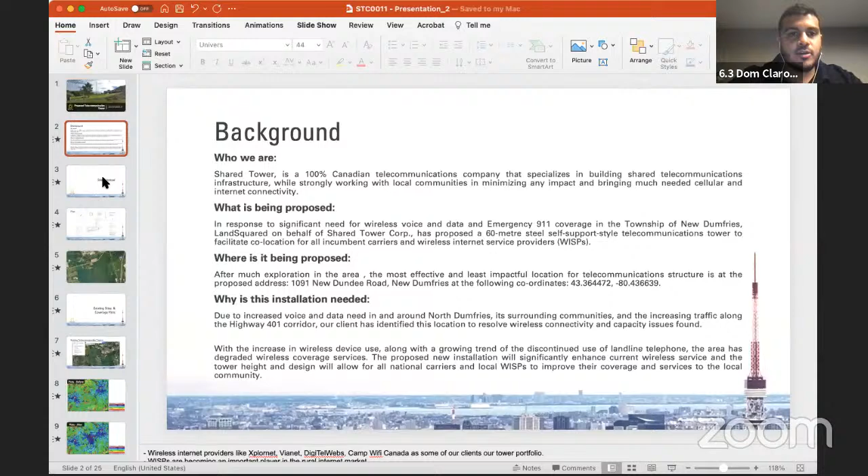In a brief overview, Shared Tower Corporation is a third-party tower provider. They specialize in building towers for internet service providers as well as national telecommunications companies. They'll build the tower, maintain it, work with the planners of the national wireless carriers and the local and national internet service providers to provide service to the gaps in the networks and to the gaps in the internet offered to the community. That was just a quick summary of who Shared Tower Corp is.

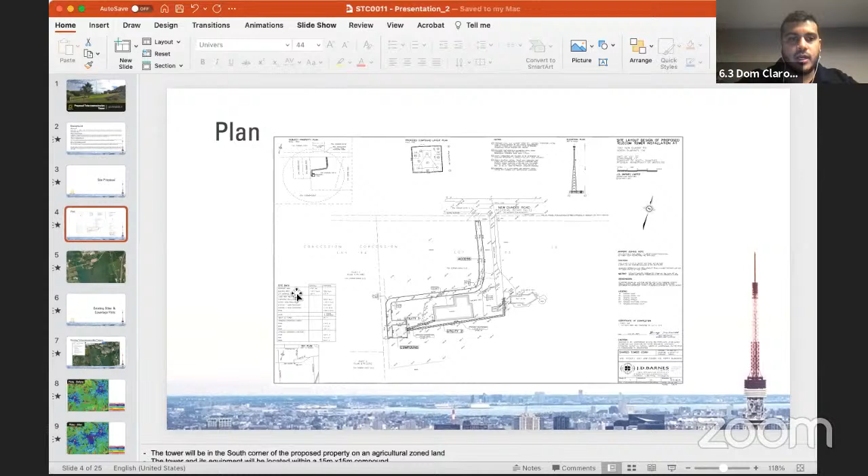This is the proposal on the property. It's just tucked into the rear and side of the garage on the property. This is a high level view of the property and the proposed location.

Next, I'll take you through some of the existing telecommunication towers in the area, along with the coverage plots designed by our engineers, or third-party engineers, working with the planners of these national carriers. To the northeast of the proposed tower is a tower up on the hill that is very recognizable, where Bell and Rogers are located. Closer to the highway, to the southeast, is a Rogers tower, and to the west is a Bell tower.

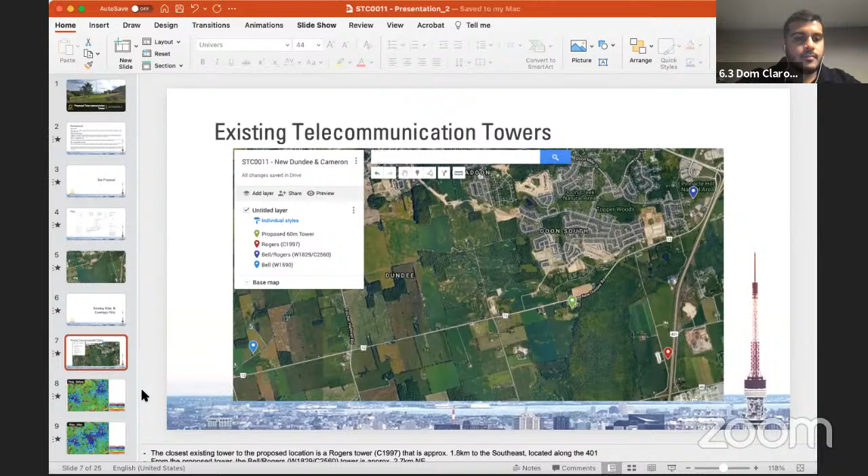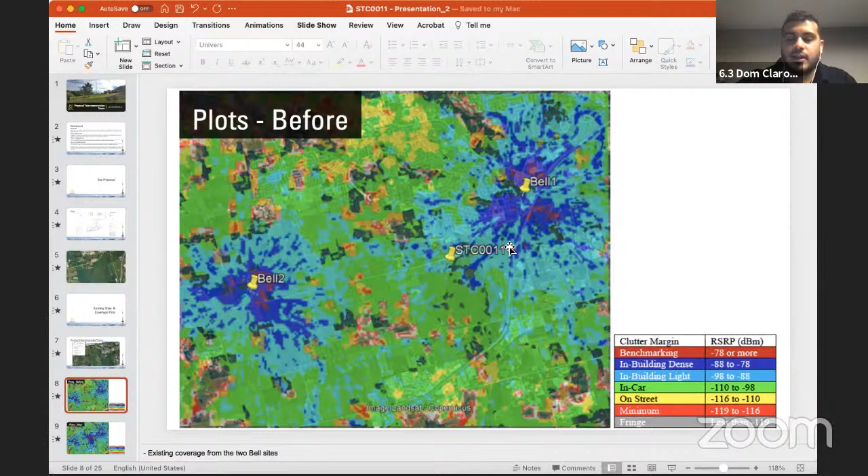There's an inadequate level of coverage in between these towers, and our proposal seeks to help enhance the network. As you can see here, these are our coverage plots with the proposed tower location, which would provide cellular and internet coverage to the residents in the area, as well as down North Dumfries or New Dundee Road heading west.

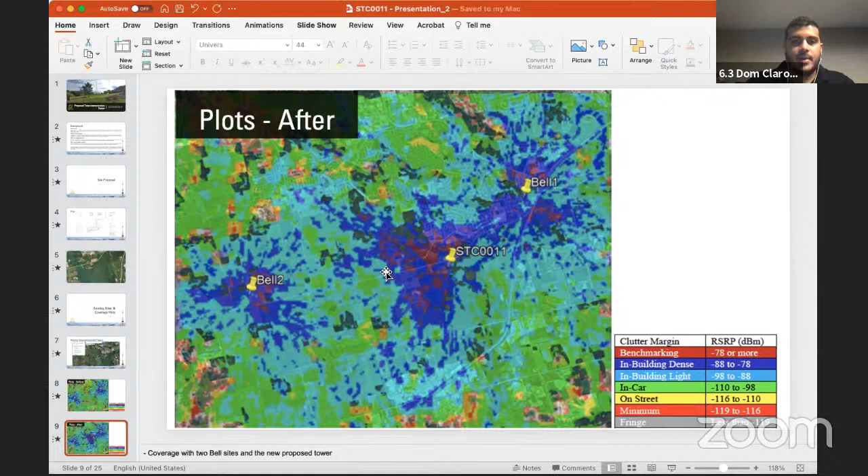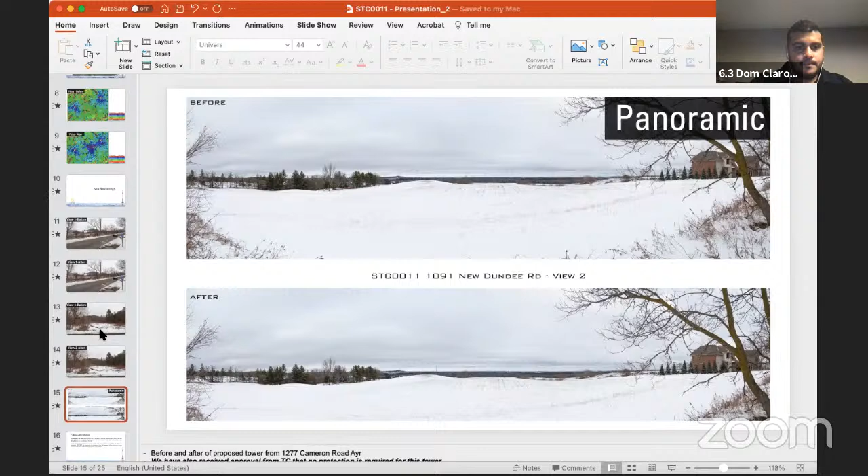So this is a view from Cameron Road, which is about 1.3 kilometers west of our location. As mentioned, our public consultation period took place in November through December. We held a public meeting where we had numerous comments before, during, and after the meeting regarding the location, the style, and the height based on the location.

Since then, we've been working hard to update our proposal. We've finally been able to, in working with the carriers and their network needs, and our engineers, come up with an updated proposal of what we would like to present to the public and to council, to the planning team.

We tried to have everything ready ahead of time. Our plans just came through, and we've been working hard up until the last minute, up until even today, to formalize everything with the construction team, with the engineers, and to work with the planners of the carriers to make sure that we put forward our best proposal for the public.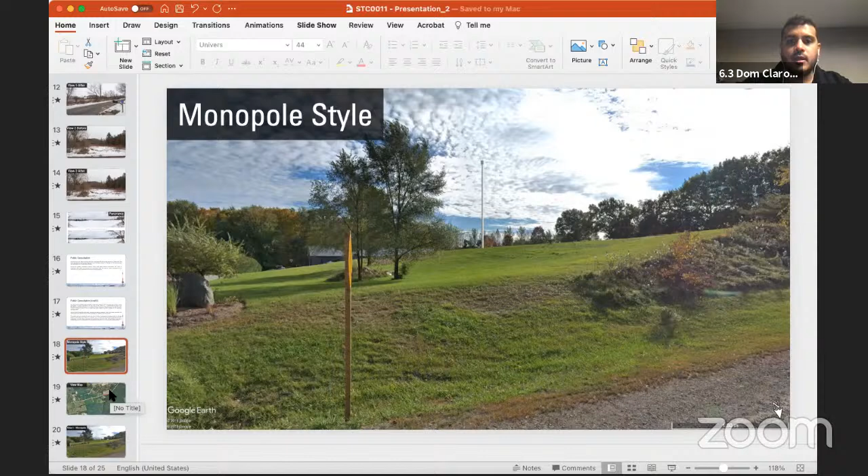You can see, even compared to a regular monopole, it is quite a bit slimmer, with antennas at the top that are flush mounted and painted to match the style of the monopole, which will blend in to the skyline quite a bit more than our previously proposed designs, including our updated proposal.

This is a view map presented so we can get a better idea of what the most recent proposal of this monopole would look like from these locations. The last two views, view 3 and 4, are both on Dodge Drive. View 1, which we just saw, is directly in front of the property. And view number 2 is the panoramic view from Cameron Road, which is about 1.3 kilometers away in direct line.

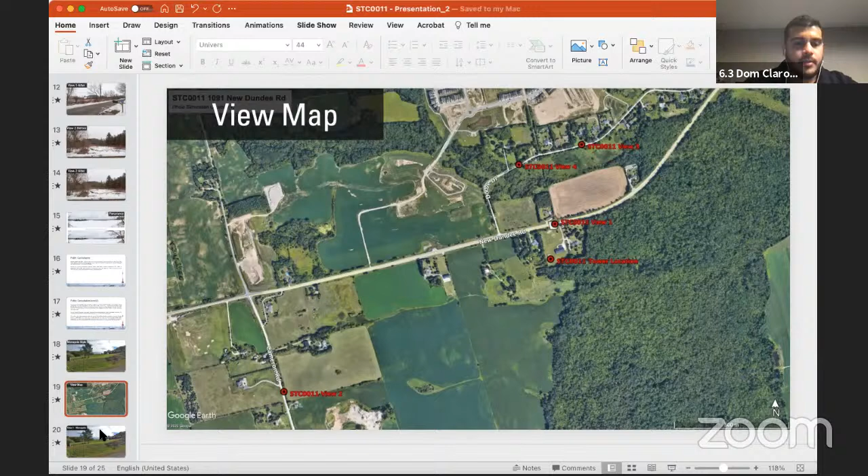So again, this is view 1, directly in front of the property. As you can see, the sight line is quite a bit better. Aesthetically, it's a lot more pleasing, and it takes up a lot less room both at the base and surrounding the pole.

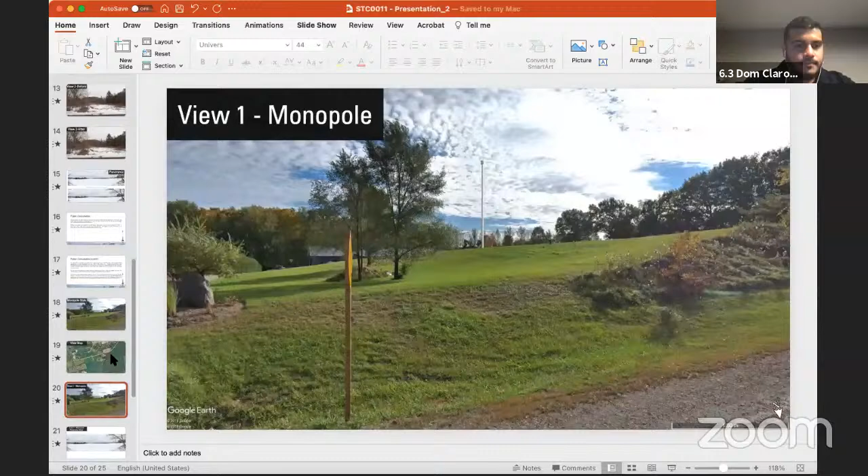That's something we really wanted to do for the area residents, and that's actually why it took such a long time to develop this updated proposal. Our engineers needed to go out and conduct different measurements from different areas in order to properly blend this in as much as possible.

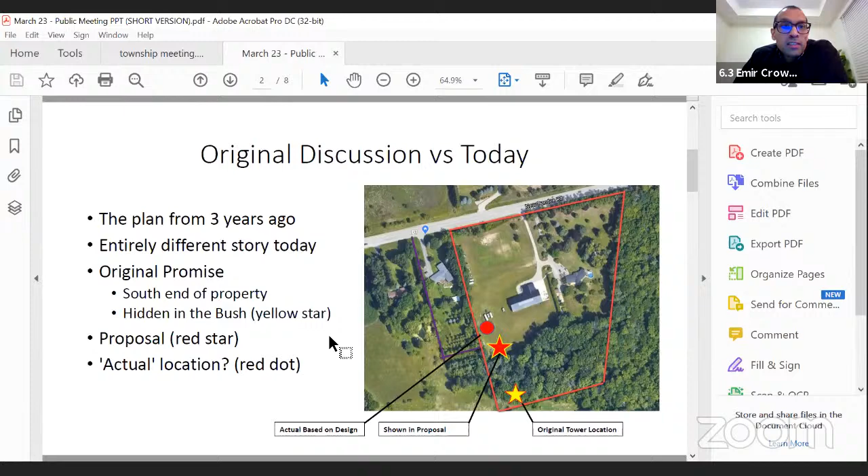We put that there because it is hard, understandably, for the public or even I as counsel to advise a client on a proposal that's constantly shifting. And there's a lot of fine print here, but you can ignore the fine print.

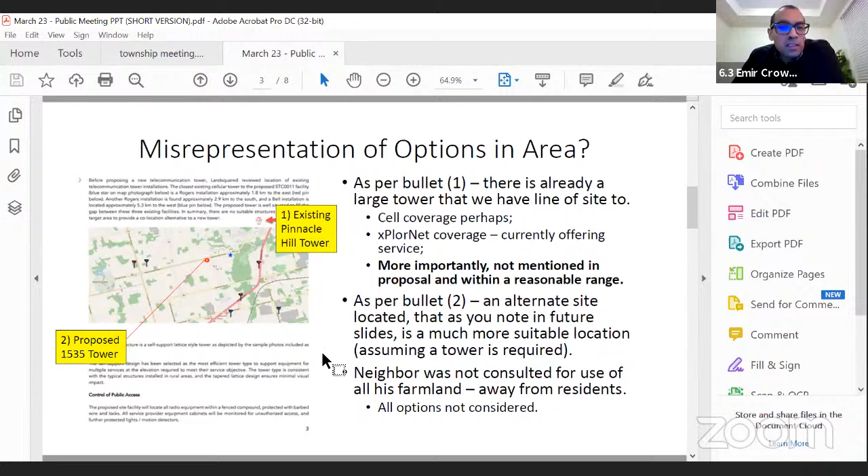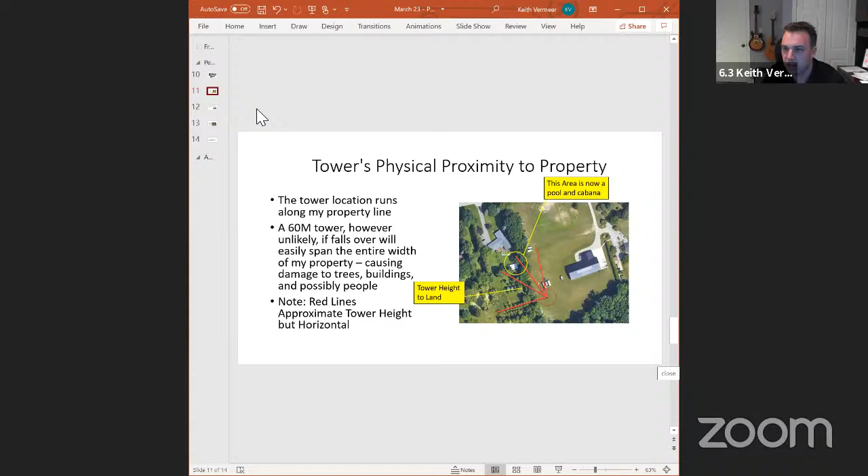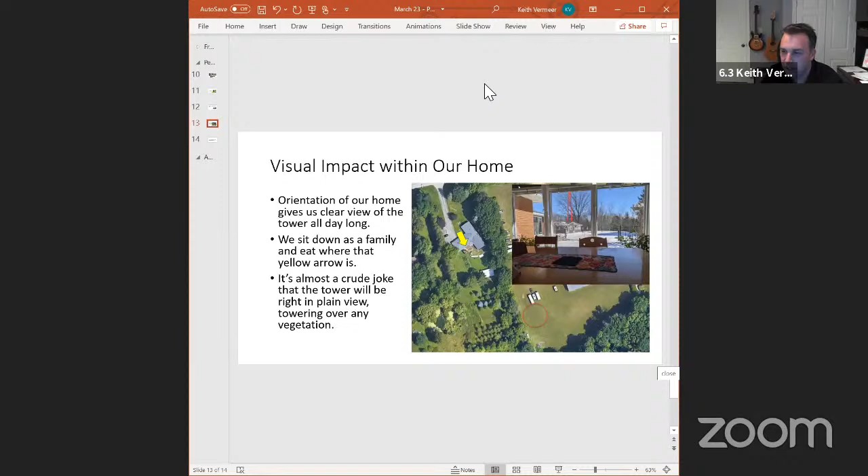So in conclusion, I challenge the community for the need of the tower, and if there is a need, to thoroughly explore other alternatives—whether the proposed tower up the road, the existing Pinnacle Tower where we actually get our internet from today, which is how I made it onto this call, or other farmland all around us that could be used instead. Technology is also rapidly changing, and I'd challenge the relevance of a cell tower, especially 3 to 5 years from now. Once it's built, it's really not going anywhere—it's going to be stuck there.

I just wanted to put that out there for everyone to hear, and I do appreciate your time listening to my presentation. So thank you.

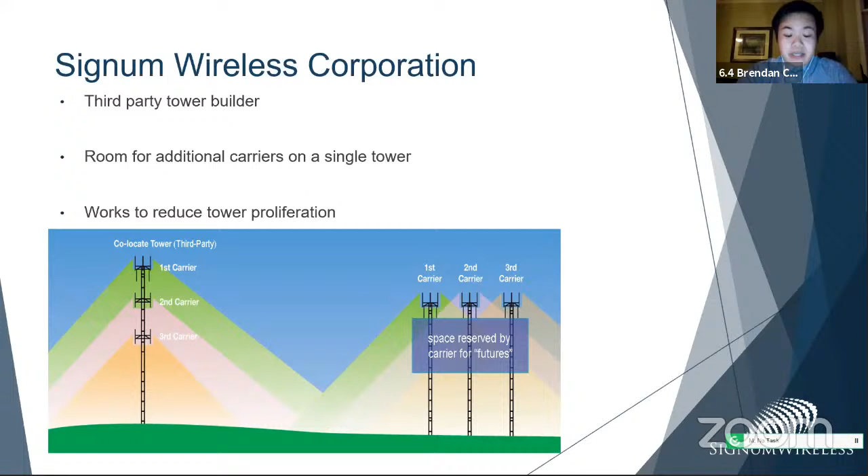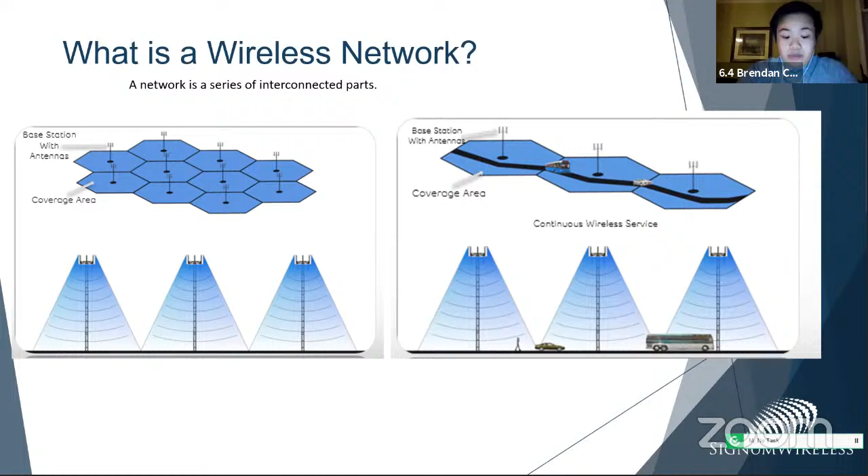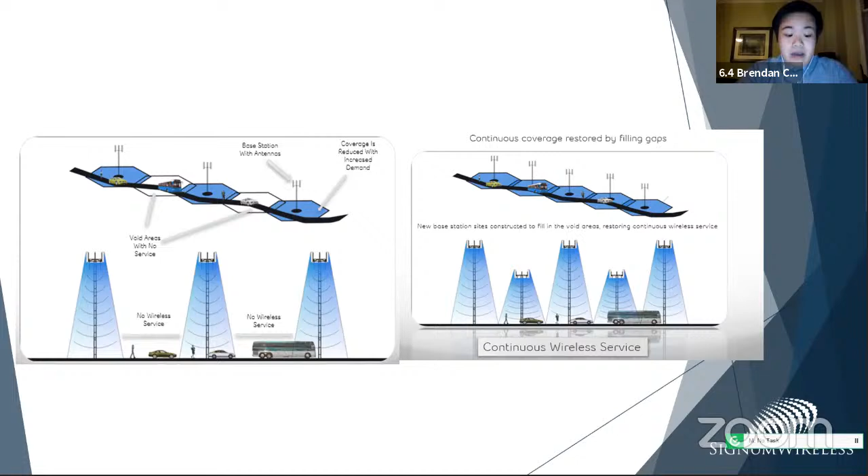I'll touch base on these slides a little bit. Just some general background information on wireless networks. Wireless networks can be thought of as interconnected parts with base stations and antennas working together to create a network. When providing their services, these networks create coverage areas which provide telecommunication services, and when adequately placed, they provide continuous wireless service to an area. Unfortunately, these networks only service a fixed number of calls and data requests at a time, and if there's an increased number of calls, the network's coverage is reduced to provide service just to the closest signal requests. So to solve these problems and provide adequate telecommunication services, these gaps need to be filled by constructing new telecommunication towers.

So this telecommunication tower is to address the lack of telecommunication infrastructure in the area. So these towers are the closest towers to our proposed site.

There is a Bell tower approximately 3.8 kilometers west, with antenna height at approximately 48 meters. There is a Rogers and Bell tower 3.9 kilometers northeast, with antenna height approximately 75 meters. And there is another Rogers tower 2.9 kilometers southeast, with antenna height approximately 50 meters.

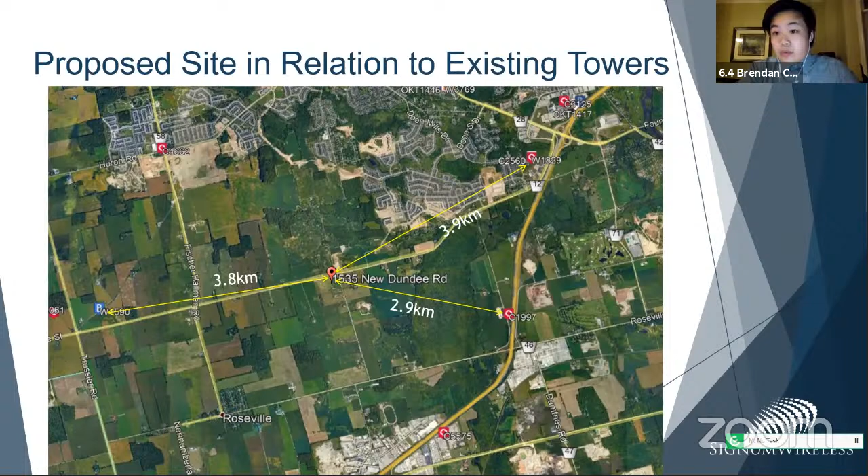In conclusion, wireless service in North Dumfries is in need of upgrading to serve current and future needs. And this one tower will be able to accommodate up to 3 carriers, preventing tower proliferation in and around the area.